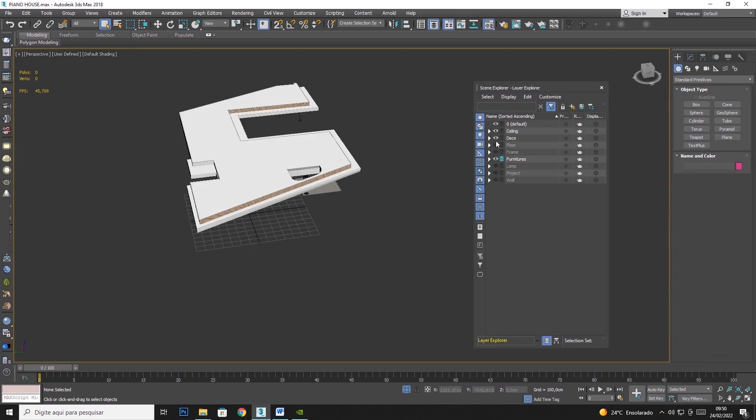Let's open the layers so we can see the whole project again. This project here, we don't need to use it because it won't go to Unreal.

A very important thing is to map the number one channel to take the project to Unreal. The reason it's important, actually it's not really essential, you don't need to do it, but it's a good strategy for some objects based on one criteria.

Which one? Let me show you what the mapping of the number one channel is. I'm gonna show it to you on Unreal, okay? When we talk about materials, we will create a load that will make it easier.

The texture scale. I can increase or decrease the texture scale directly on Unreal. To do it, it's easier if we leave the channel mapped in a square shape, mapped 1 by 1, 1 meter for 1 meter, or 100 centimeters for 100 centimeters, okay?

And what's the criterion that I'm going to use to define if this object needs to be mapped 1 for 1? Let me open a parenthesis here.

When we talk about Unreal Engine 5, we have basically the Lumen technology, which we're going to talk about when we get to Unreal Engine 5. If we use the Lumen technology, we don't need to open the mesh, which means we don't need to open the number 2 channel.

Using Unreal Engine 4, the light information, a thing that we call build, is stored in the number 2 channel of our model. When we talk about Unreal 5, specifically Lumen, everything happens in a dynamic way.

The ray tracing, everything happens instantly, so we don't need to store the light information, the build result, the render result, in the number 2 channel. We don't need the number 2 channel.

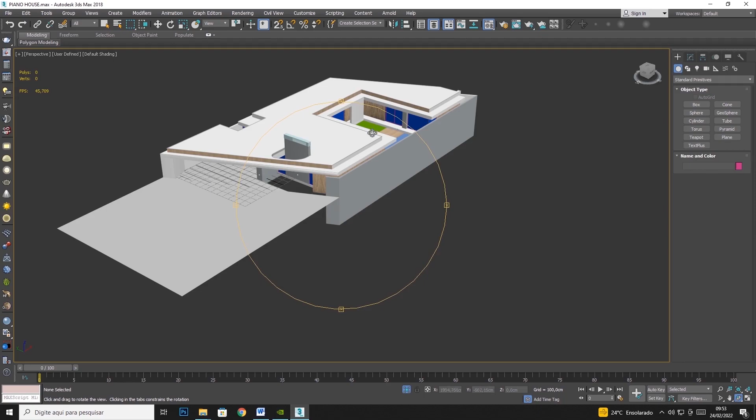When you are inside 3ds Max or Blender or Maya, for example, you apply the texture in your model, right? You open the materials, suck the material, apply a texture, and put it on your model. When you do it, you're applying this texture in the number 1 channel of your model.

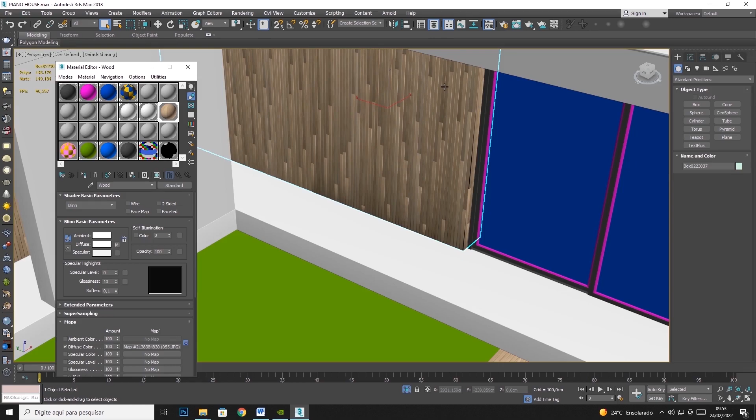For example, let me isolate this. If I apply a modifier here called unwrap—you don't need to do it, okay? Just because I want to show you what Max does.

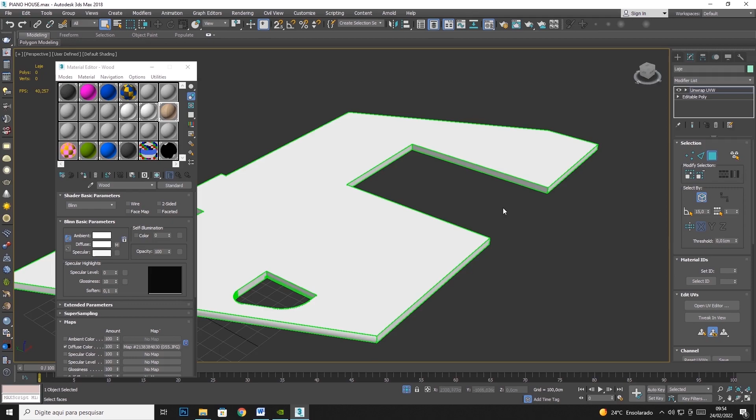When you put a texture, a wood for example, here, 3ds Max is using by standard the number 1 channel of your object. Look at this, so it is mapping the number 1 channel. Let's open the editor, look at this.

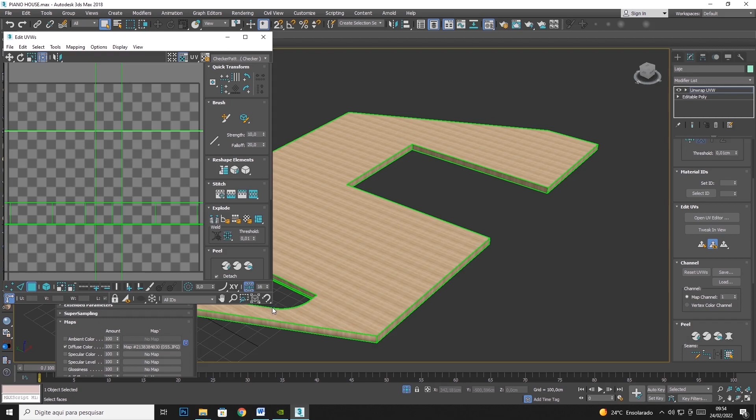Obviously the mesh is not open. It's not mapped in a way that the cuts are correct and the mesh has been thought out at the time of opening.

As we are talking about the masonry, the ceiling of our project, we don't need to map specifically each area, not for this project.

But obviously, if you have an armature or some model within your project that you need to do a specific mapping of channel 1, then you will do a specific mapping here inside the UV editor, but even though it will be mapped in the number 1 channel.

When you talk about Unreal Engine 4 and Unreal Engine 5, there are many ways to process the lights and the materials and the bouncing inside there.

You have dynamic lights, you have the build process, you have the GI lumen technique. There are several ways to do the same thing.

In this course here, specifically, we're going to talk about the Lumen technology, where there is no necessity to do the render of this light.

When we talk about Unreal 4 and Unreal 5 using the build technology, we need the number 2 channel to store the light information when we're using the build process.

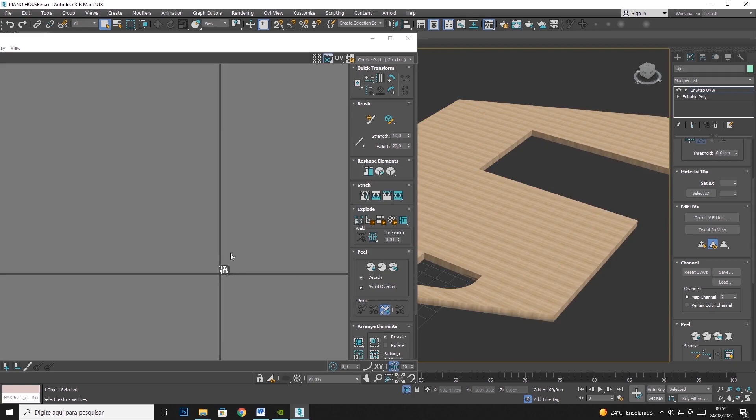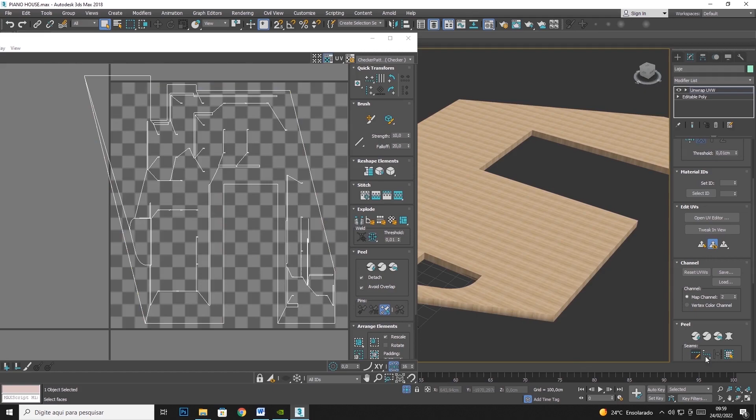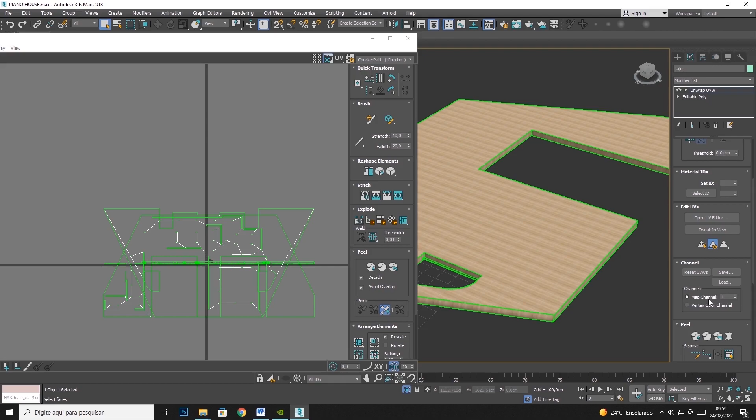So all the materials that you apply on your model go to the number 1 channel, okay? What is interesting to do? Well, you leave the number 1 channel mapped 1 by 1, 100 centimeters by 100 centimeters, because it's going to make it easier when you need to increase or decrease the repetition of the texture inside Unreal.

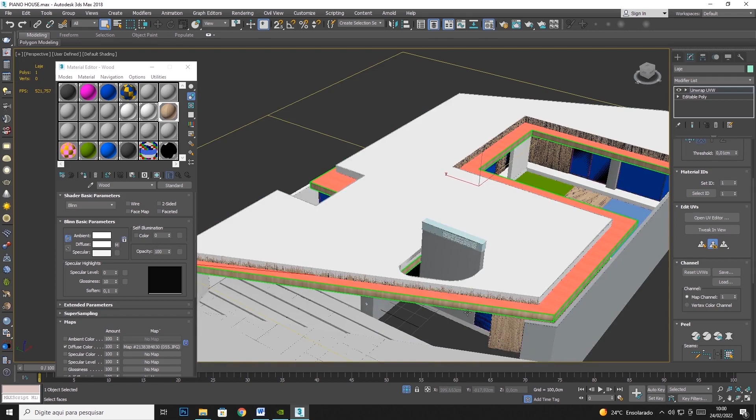It's a good tip, because if, for example, let's take off the ceiling, let's take the floor, it's going to make more sense. Look, the floor of the house. Let's think that in our project, it's a white floor. Okay, let's take a material here, white floor, and let's apply the material here. Cool.

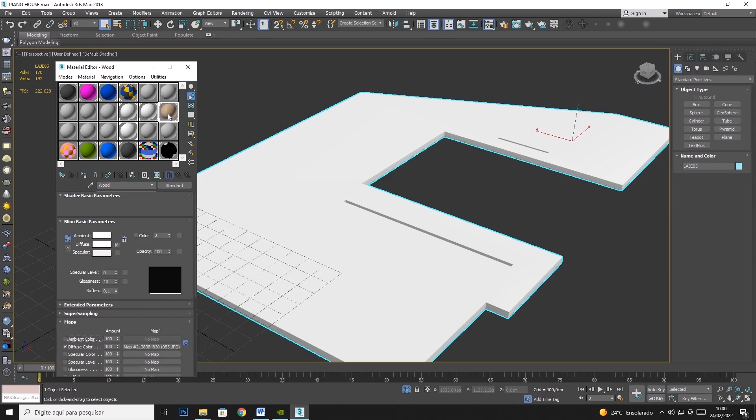Let's assume that you want to create an interaction inside Unreal where your project will allow the client to exchange materials. At some point, you will place the wooden material. It's interesting for your material to be mapped 1 by 1. Why? Because if you want to increase the wood grains, for example, in Unreal, you can do it without having to go back to 3ds Max and adjust here.

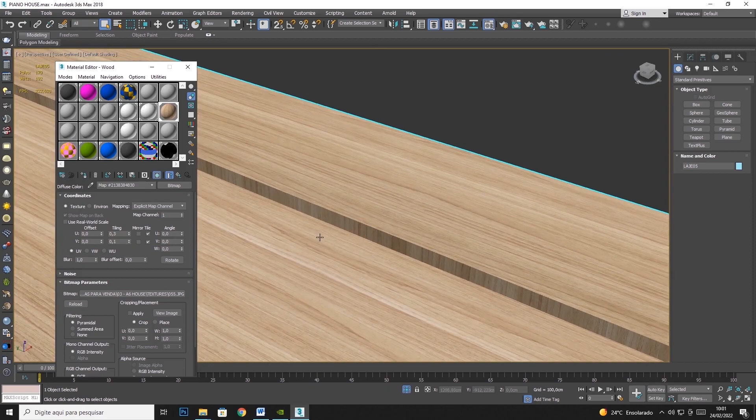Look at this. We can increase or decrease the wood grains inside 3ds Max. Perfect. You also can do it inside Unreal, but it's interesting if you leave a pattern, because there we will learn that when we create the materials, we will create a master material, which will be our main material, and we want other instances of material based on that master material.

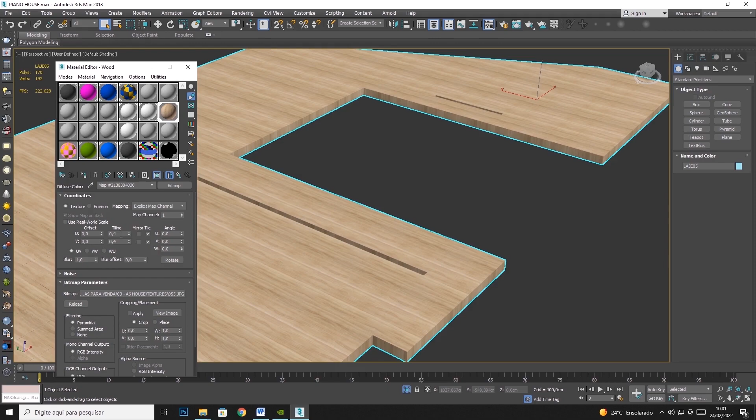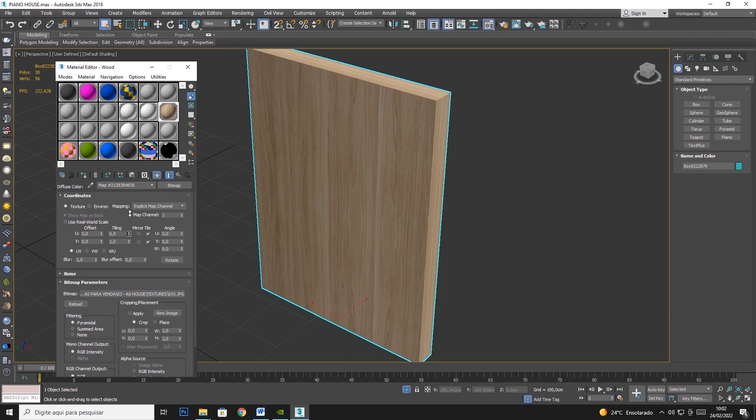So think with me: if you have a floor where its mapping is 1 by 1, you use the wood texture for this floor. And then you go to another element, for example, this wall here, where you're going to apply the same wood texture, and it's 2.5 by 1. And you want to apply the same wood texture on another random element where the mapping is 0.5, or 50 centimeters by 50 centimeters. It's going to be really complicated, we will have to create a lot of materials with different measures, and that's going to be confusing, and you will be disorganized inside Unreal.

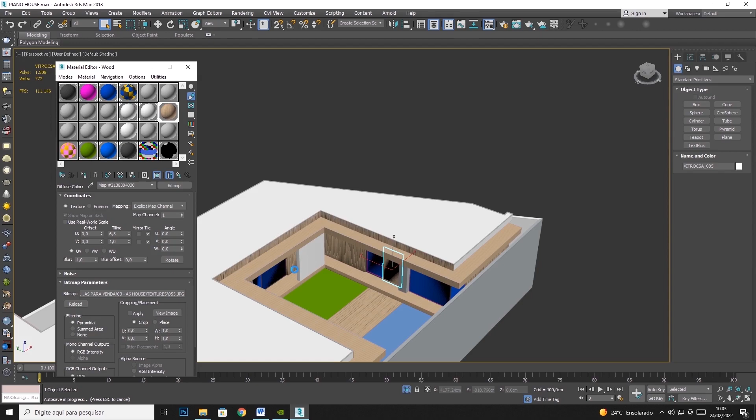So it's always good, whenever possible, to map 1 by 1, because when you put a wood texture on the floor, that will also work on the wall, also on the glass, also on other things with the same repetition, because all the models were modeled in the same measure. But for sure, there are some exceptions.

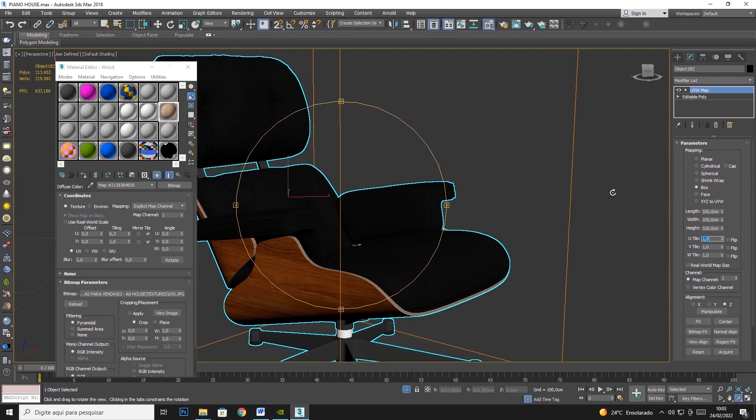For example, let's suppose you have this armchair, and this chair specifically has a specific mapping. Look, I have this direction here, another one here. So it doesn't make sense to put the 1 by 1 mapping, because you will screw this up. This model is going to be screwed up. Look at this, it's not really cool. Here the mapping type is really specific, and you probably will not change the wood grains, so it's okay to create another material, because this is a really specific object.

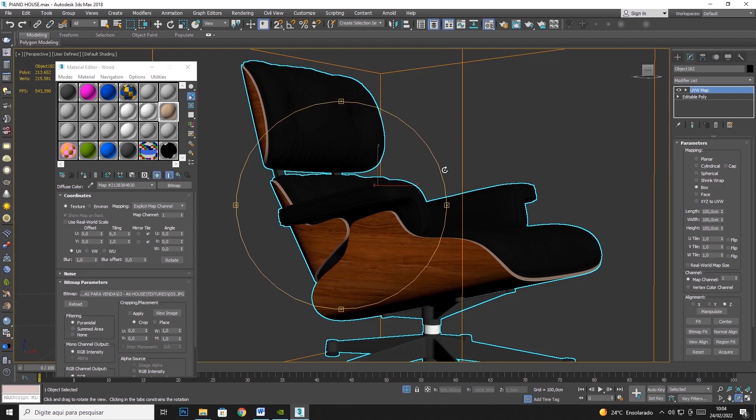But for general objects like walls, floors, pergolas, things where you can possibly increase or decrease the texture repeat size, it's interesting to leave them mapped 1 by 1. So let's do it. I'm gonna explain how you can do it. Control plus Z, or you can simply delete the modifier.